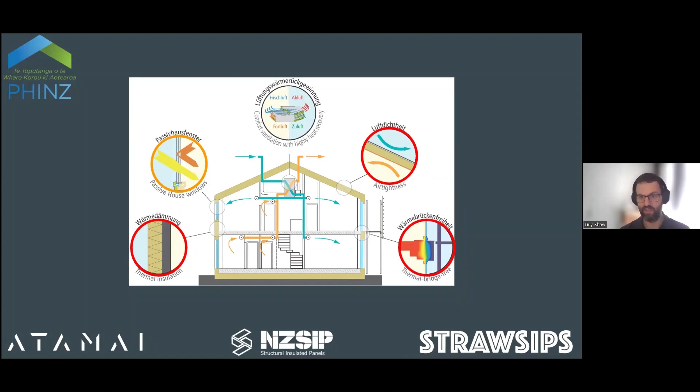So that is, in this case, achieving airtightness, eliminating thermal bridging, and achieving a level of insulation, let's put it that way. And I've circled windows as well there because there's an interaction obviously with wall systems. But windows are a topic all of their own, so we won't cover them in this webinar in detail.

And what are the problems with business as usual? I want to emphasize that the following observations - we're not aiming at criticizing any specific actors within our industry. We acknowledge that we've got this current emphasis in the building code on the building code as a minimum legal standard, and that's driven by historical factors and competitive pressures. But it does present an opportunity for us to acknowledge the shortcomings and to raise the bar and champion best practice.

The standards themselves - PHINZ is responding to consultations where we get the opportunity. And I think there is really the aspiration there in the industry to try and do better. Quality becomes the norm.

So in terms of those fabric requirements for meeting the Passive House standard for walls, some of them are fairly basic, but we really struggle to consistently meet these requirements with business as usual. Insulation that is uniform and fills each cavity completely, without gaps or voids - this is not something that's that easy to do with business as usual. Frequent surveys of as-built projects has found this.

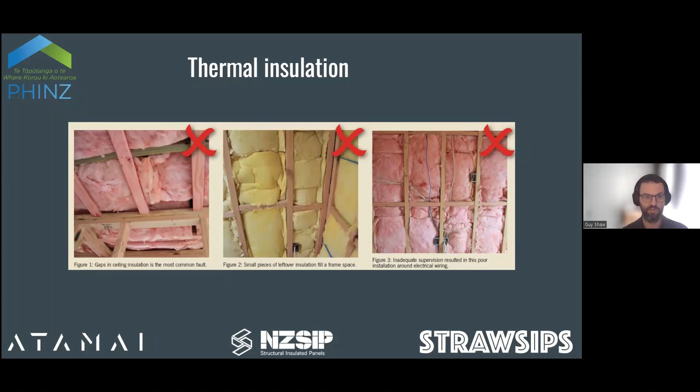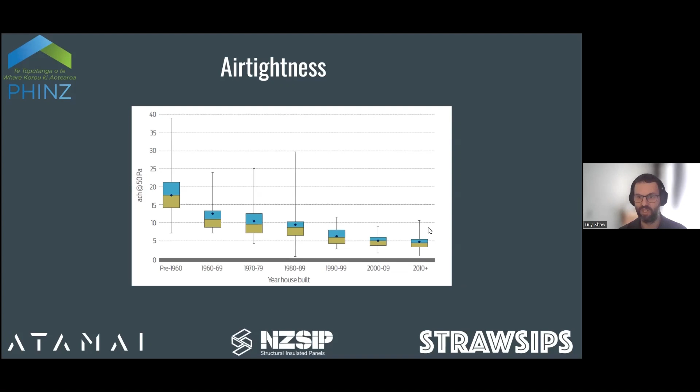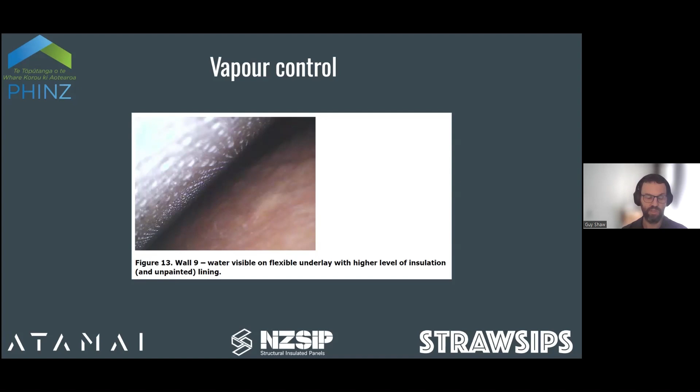We've still got a real issue with vapor control in buildings. The work that BRANZ has done has identified an issue that's been apparent to anyone who's opened up a recently built wall assembly and found it's been raining inside the wall. So any attempt at improving wall performance, increasing insulation, has to go hand in hand with a strategy around vapor control.

This is just not required at the moment in the building code. And then in terms of thermal bridging, I'm focusing today less on junctions and more on the thermal bridging that often occurs in typical wall assemblies, just because there's so much framing in there. Our assumptions around when we calculate R values are based on quite optimistic timber fractions, when we know the reality is far worse.

The percentages assumed in the calculations for H1 compliance are more often than not out by 50 to 100%, which just means that the real world performance of those walls is significantly different from what's been assumed.

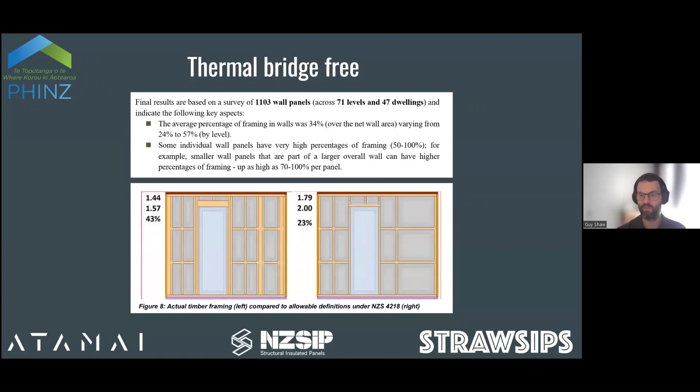And what are the solutions? Well, today we're focusing on off-site manufacturing, because there are different strategies for delivering the significant changes we need for wall systems. It's not to say someone working on site cannot make these improvements, but in this case we're focusing on solutions out of the box, essentially, that you can tap into quite quickly and easily to address these issues we've identified.

Now, there's a whole range of different prefabrication typologies to consider for any project, but today we're looking in particular at panel systems rather than whole buildings. And of course, for any project, there's the option of all sorts of different prefabrication approaches to consider.

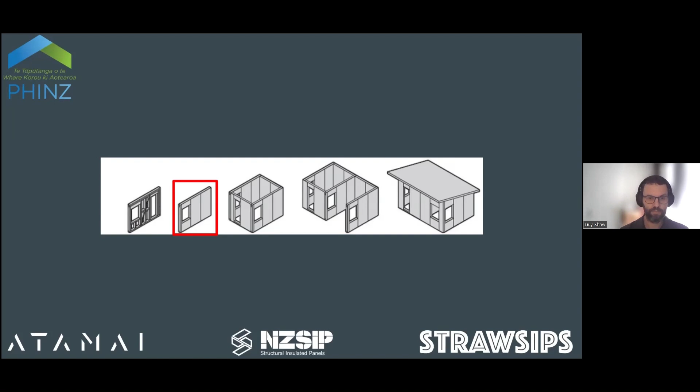Before we jump into the section on interviews, to keep this productive and respectful, we're going to be focusing on the individual benefits of each system. We're not making direct comparisons between systems, and I ask that the audience questions follow this lead. Clients and project teams are best equipped to decide which system best fits their needs, and ultimately we all want to see offsite manufacturing thrive. There's space for a whole range of different systems, and our real challenge here is changes to standard construction practices.

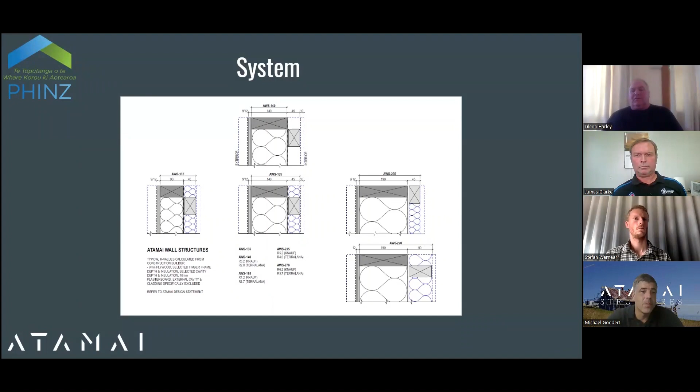Yeah, that's useful for people to know about lifting with the Intello on, so you've got that ability to bolt down. So that bottom batten is not on - the Intello is only tacked with staples. Usually on a 6-meter wall it would be tacked in both corners and in the middle.

So you lift that up, do your bottom plate fixings, and the council engineer can come along and inspect them. It's nothing special for them, just standard bottom plate fixings. They come along, you put the insulation in, take photos for either the passive house certifier or the council, Intello goes down and gets glued or taped to the floor, and then the bottom batten goes on.

And so obviously all your ply is on and those kind of things. So you've had the inspector through, or you've taken photos. With self-certification, it might actually make your job a lot easier. And would you say that's true?

100% self-certification will definitely make it easier. We've worked with the Christchurch City Council now, for example - if we have engineers inspecting it, we don't need them to come in as well, so we're just good with the engineer.

But yeah, it's self-certification - I think it's going to take a while in New Zealand to get that implemented for builders in general. We're working on quality assurance programs, but we'll have to get them accepted by every council step by step. You can't just go and say, here's a quality assurance program - you still have to talk to the local building consent authority and get it accepted by each council.

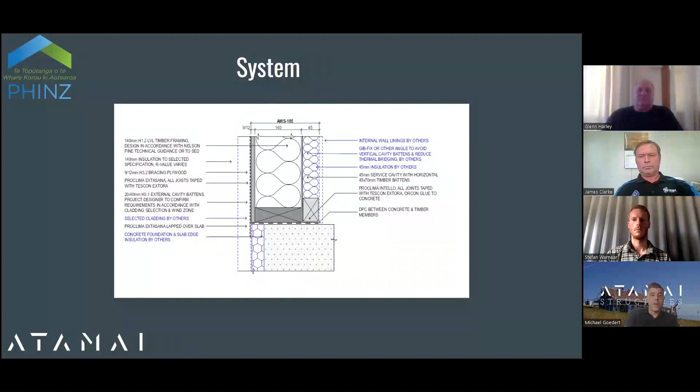Queenstown Lakes District, for example, for inspecting insulation, what we've done is send them the wall plan with the number on it, and a photo of the insulation being fitted in the workshop with the wall number written on the frame and the R value of the insulation next to it, and they're quite happy with that. So it's a bit about communicating with the right people at the right time before we start a project.

If we haven't done a project in a council before, I call the normal council hotline - with Queenstown Lakes District I've got 2 or 3 guys there now that I know are the right people to call. Same in Christchurch. So you just kind of work your way around and make it happen step by step.

You get well known, Michael, I'd say. Yeah, I sometimes like to be more in the background.

Infamous. So Stefan, your installation process, could you walk us through that? And I know with the straw bale and the airtightness, it's...

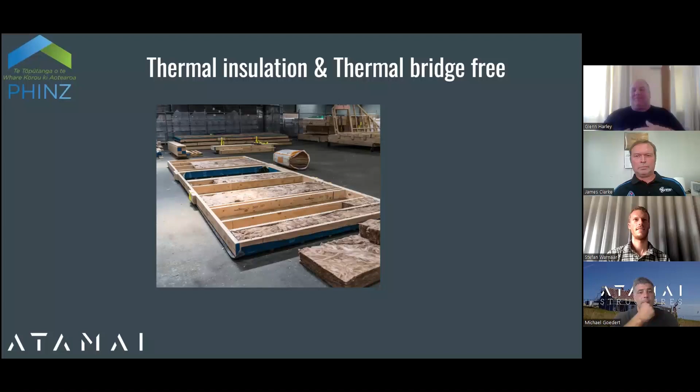Like Pro Clima, for instance, have got a product that goes from the ceiling and down and gets plastered in. I've actually used that on one place that we did, an addition to my straw bale house, and it worked really, really well. I thought the system was that overlap between European and New Zealand approaches—this doesn't happen very often because they do a lot of plaster work, right? So if you could talk a little about that.

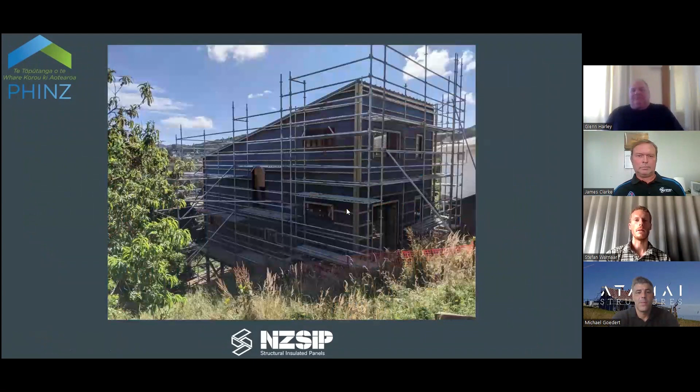Yeah, so our panels are typically sort of up to 900 mils wide, and anything below that as well. They're delivered generally stacked onto the foundation, and then it's relatively easy for two people to stand them up and move them around with a sack barrow or something, and sit them onto a bottom plate.

They essentially just get screwed together from the inside and outside face. It's kind of like a double stud frame with the straw in it. So it's just a matter of stacking them up one by one, screwing them together, then screwing them down, and a lot of other hold-down fixings and bracing is externally designed, a lot of it relatively typical New Zealand straps and brackets and that kind of thing, which makes sense with typical flooring and roofing construction.

For the airtight layer, we'd probably use a lot of those Pro Clima tapes, ones that have tape with about 100 mils of mesh into it, and that can tape into the Intello on the ceiling, and then the plaster can be the airtight layer. The main weakness of that is still maybe around electrical boxes and stuff, but there are airtight backings for electrical boxes.

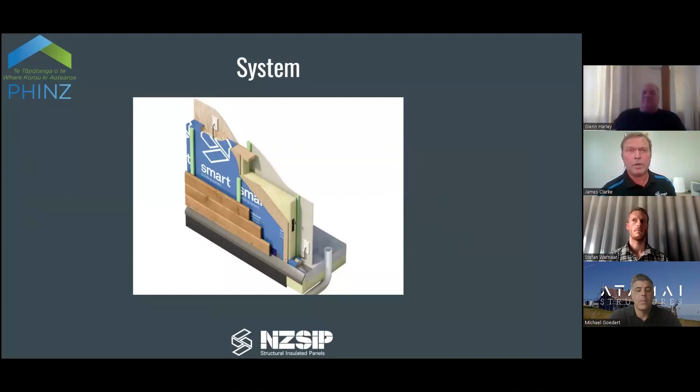The cam locks gave us that ability, and because we actually foam inject in the factory, they're embedded within the panel, so they're molded in. A lot of people were very skeptical about them structurally, as you would be - why wouldn't you? I was the same when you do your due diligence, but we were really drawn to cam locks for thermal efficiency, but also speed on site.

We were finding that panels together, cam lock them in, pulls it in tight. That helps with achieving that air tightness as well. Once we'd started the cam locks, we could never go back. It just made perfect sense to us.

And the key thing is it's fun, Glenn. Puts a smile on your face. You turn that key - yeah, it's quite a good feeling.

And it makes for a reduction in timber too. Yeah, it does. Again, driven by trying to get the maximum performance out of the panel, and also that labor - because I had a construction company at the time, and we were always looking to speed things up, and how best to do that. The cam locks do it beautifully, it does reduce that timber content within the panel.

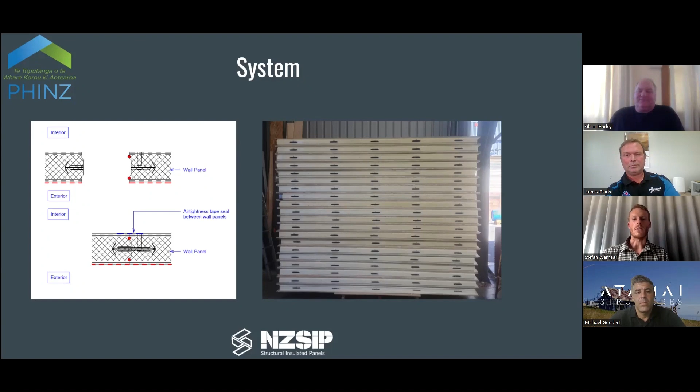And a lot of climates, like here in Wanaka, to be honest, in winter the air quality is pretty low with people burning, having their wood burners going. So having a filter in your mechanical ventilation means you don't have to open your windows in winter and you're breathing fresh air. So something like that is a massive advantage versus if you go traditional - you're going to have to open your windows, and that's potentially less healthy than having mechanical ventilation. So I don't really get into it.

I just let people do what they want, and most people in the end up designing with something that's closer to a passive house system than a non-passive house, traditional earth building style.

I think I was pretty finished. I would say that prefabrication has been mostly pretty well received. Some people still want to build the traditional way, but I think they'll only ever do that once, and then they'll go, I never want to do that again. Just the time saving, the amount of effort you have to spend, and the fact that you're going to spend weeks doing your walls versus probably 2 or 3 days is just a massive difference for any type of building to actually see some progress. Yeah, okay.

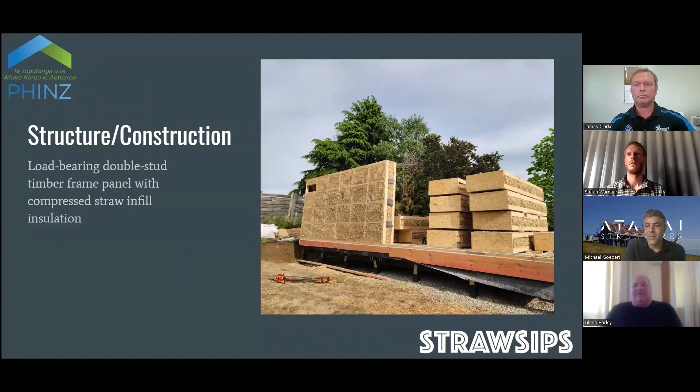Question, and it might be putting you on the spot a little bit. I'll start with you, Michael, because I know you the most, so I can put you on the spot the most. Is there any detail that you would like to drag up and talk about for a couple of minutes, to satisfy the nerds amongst us? Is there anything that sums up your panel, or your project, the parts you like about it?

Yeah, that photo is actually not a certified passive house, that's my own house. You know that one, don't you? You've been there. I was there at the stage that you could walk on things, like the mid floor.

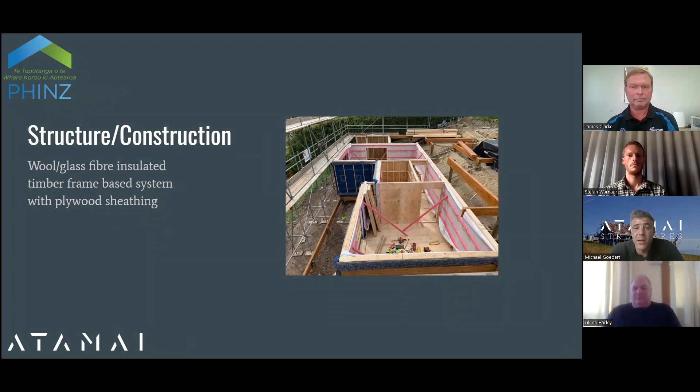The thing with the Atamai system is it's nothing like reinventing the wheel. The framing, unless it's SIP framing, is still standard 3604 framing. There's a couple of connections, screws from the exterior or screws down the bottom plate. You can see the Intello being folded up, same as what I described before. On my place, maybe 60% of the walls had the cladding on as well, and the windows were in.

That's Tortora Street, the certified passive house. On Tortora Street there's nothing really in terms of connections where I'd say you really need to watch out here or there. The main thing is making sure you get the continuous airtightness right. You probably need a sit down at the beginning, especially if it's one of the first times doing an airtight build, to figure out how you're connecting things together, so you're not missing a potential connection strip. But other than that, it's more or less just putting standard frames up, to be honest.

Is that the answer you want? Or is that even answering the question you were asking?

I guess that's pretty important, because it tells you what you value around the system. It's really tried to keep it as simple as possible and not reinventing the wheel. Just work within what New Zealand's got and try to optimize it towards the point where it can be passive house. Realistically, if you look at Auckland, you could probably get away with a 4x2 frame, an R2.8, and a service cavity to achieve the insulation values required up there. So you don't need to change a lot to actually get there, if that makes sense.

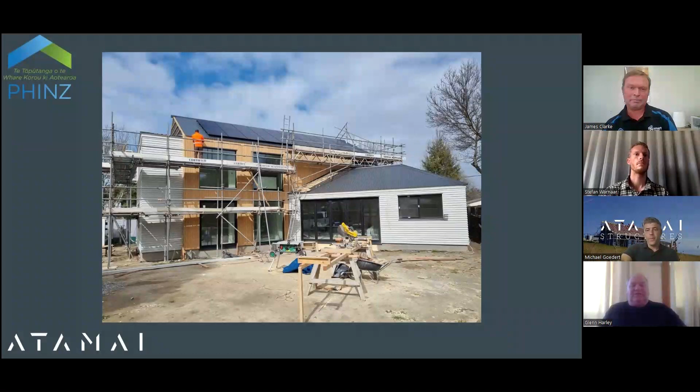So, no, that's a great point. And I guess, James, for you, what would be one of the key takeaways for people, a point or a detail that you would like people to go away with?

If you've got a ridge beam coming into a pocket, just remember your straps that go on the outside face of the panel onto the top of the ridge beam. Do not forget those straps. So I think my key takeaway again is site documentation, read those little quirky engineer's details that do pop up. Echoing what Mike was saying, a lot of it's a process, you're standing things up and putting things together, but just check all the details. We've got QR codes on our drawings that lead you to standard details.

But it's always those little straps, use the QR codes. I'd often get the odd call, 'Was there meant to be a strap that went up the outside face and on top of the ridge beam?' And you're like, yes, there is, especially in extra high wind zone uplift - I hope I'm not getting that after code of compliance. I just can't stress enough, follow your documentation. There's nothing too wild that you really need to think about, but just check your hardware, those little details are important.

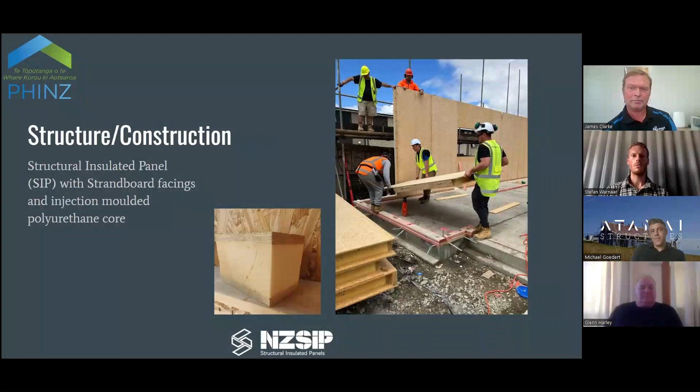Yeah, that's great. And Stefan, on that particular topic - well, our framing essentially is not 3604, and a lot of that is due to the stud spacing. We often go 900.

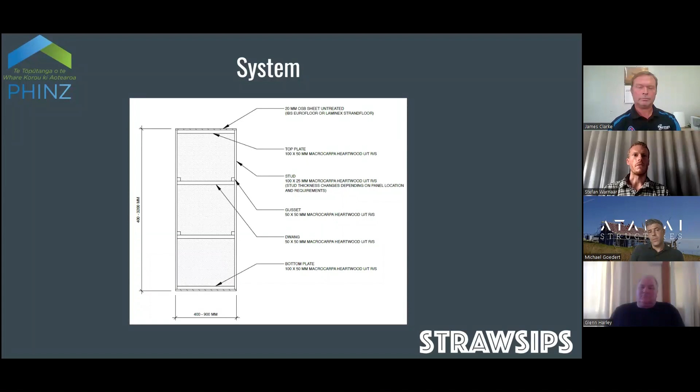So you can't really use plywood bracing on the outside. A lot of people have wanted to do something like that, but it's outside of the manufacturer's bracing tests and specifications, and the fixing that would have to be done. Also, we are mostly using a wood fiber board which is vapor permeable, much like the straw on the outside. It's not a bracing element as such, but it is a rigid air barrier, and keeping the vapor permeability of the whole wall system is very important with the straw. So most Ecoply or RigidRAP type systems wouldn't work for a number of reasons. That's one thing that needs to be considered.

I would say that the wood fiber board, which we're typically using like Steico or IBS Eurowall, is actually easier to install than plywood or OSB. They're all four-sided tongue and grooved, so you can basically wrap the whole building in a day or two, which helps to protect the building as well. That's the main difference with our framing system and how the external side of it is done compared to a lot of building these days.

And so the introduction of the Steico, or the wood fiber, is that for a little bit more insulation, continuous insulation, or talk me through the why of that.

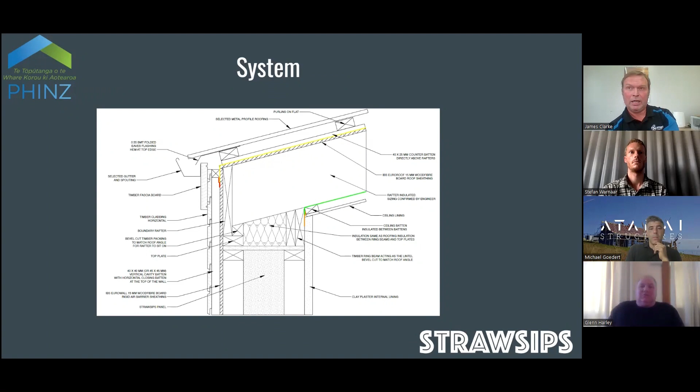If we could start with you, James. For us, it's a bigger press for bigger panels, and we were two minutes shy of our 60-minute firewall rating, so we are after that. That's us this year. We've always aspired to create bigger panels, and the market is definitely asking for it, but we'd love to complete our suite of documents with that 60-minute firewall for sure. And then we've got a new tech manual coming out as well, just as a reflection of probably our last four years of growth, Glenn, as the system evolves. So yeah, that's the future for us, for 25.

And the future of prefab and the uptake, those kind of things, like for SIPs for instance, where do you see it?

Yeah, it's strong. We have a smart series that we do in conjunction with energy architecture, and the inquiry around that is phenomenal. We're moving more and more of our smart series buildings through that mechanism, and that's what's driven us to put together the floors in different sections. We always have to consider transport, and also, to a degree, stitching and knitting in terms of making panels, putting them in packs, and sending them.